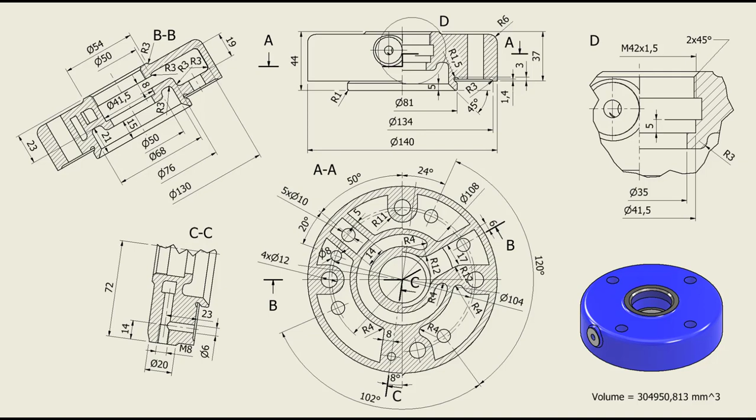Hi my friends, I'm finding it increasingly difficult to create drawings to support modeling. Although in this tutorial I still made a drawing, I propose that in the future we work with sketches instead of drawings, as you will see immediately.

This is the model of today, double lid. It seems to be simple, yes? But if you make this simple procedure, half section view, you see that inside is a new world. You see? This is not simple.

The drawing is this one. You have all dimensions here, I suppose, because in the last tutorials I made many mistakes. I forgot dimensions and so on. I'm not young, my friends.

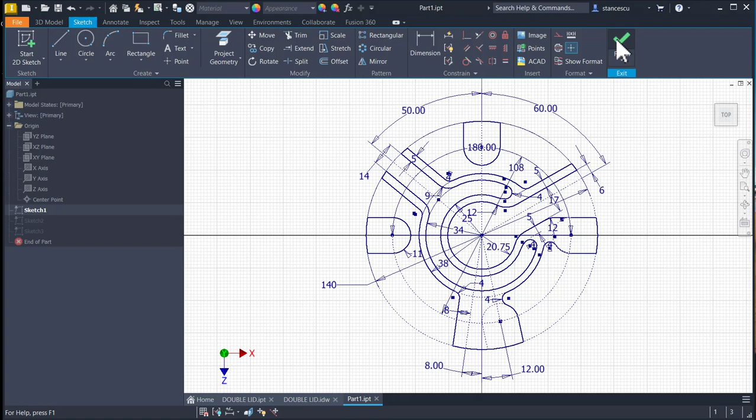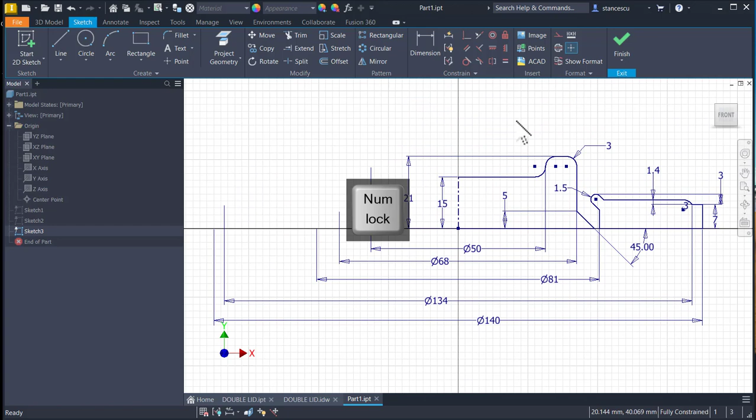So I start now directly by presenting the first sketch, the sketch I have to make, in any case. This is the first. The second, if I hide this one, this is the second. And this is the third. They participate in modeling of this part, as you will see right now.

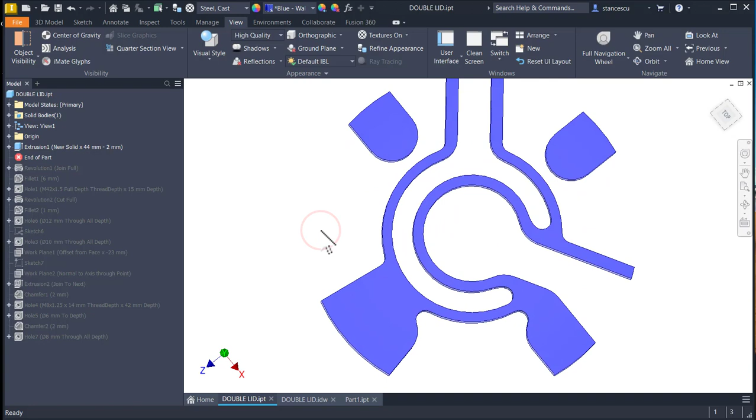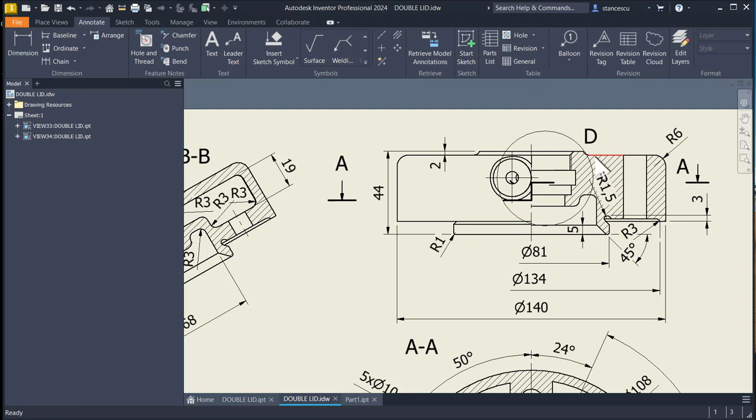I move the end of part to top and I move it only one step. This is the first sketch. The extrusion is 44 minus 2 millimeters. Now I go back to the end in order to access the drawing. You see here where that 44 minus 2 comes from, because I start from the base to this face with that extrusion.

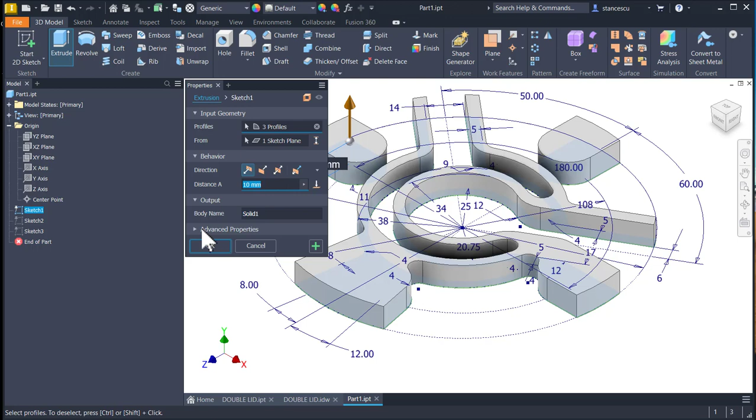Coming to the new model, I make this visible and I apply extrude of all these close contours on a height of 44 minus 2. Okay, we have the first volume now.

The sketch is visible. Yes, you see here, right here, instead of drawing, you see here dimensions. And I'm sure that nothing is missing. Since I use this very sketch to create the model, I am sure of the result. Both me and you, of course.

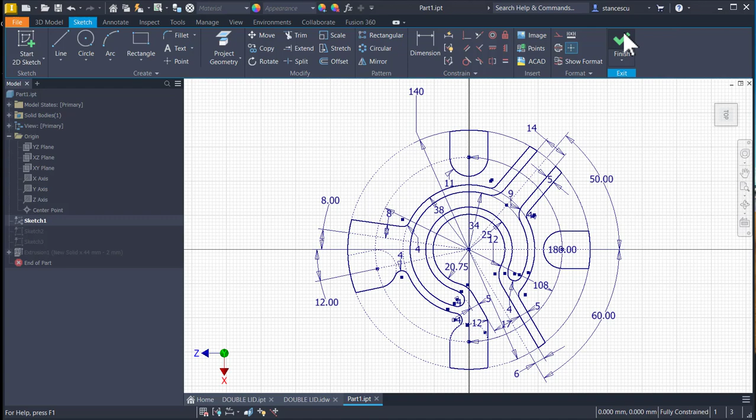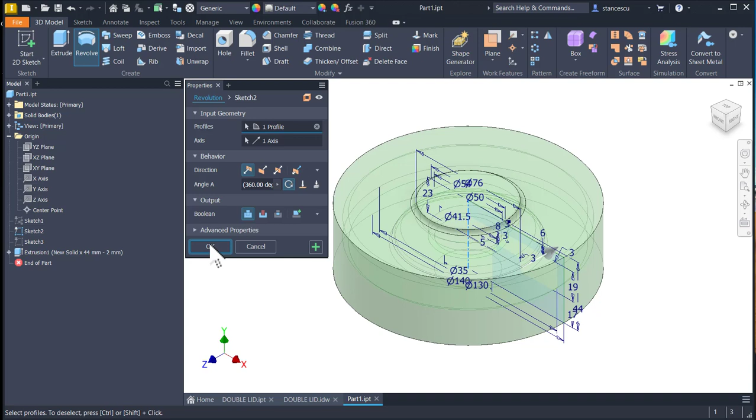Then I go to the next sketch, this one. I make it visible for you. And all I have to do is to apply revolve. Okay. I don't apply cut, because I want to add material to the previous feature.

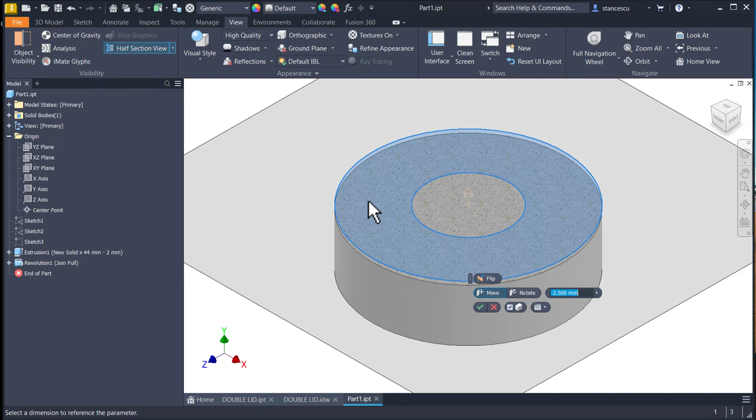Here is the real object. Take a look. View, half section view, and we have that structure inside.

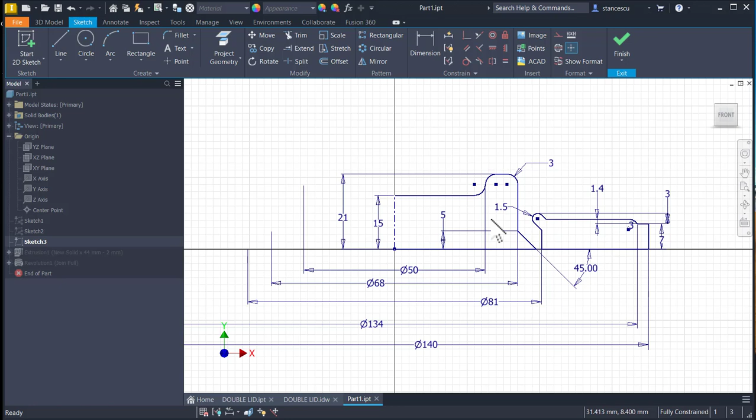The third sketch is this one, and we see that here there are two closed contour areas, so that we have to select both of them. I make this visible. I apply revolve, and I select the first and the second closed area.

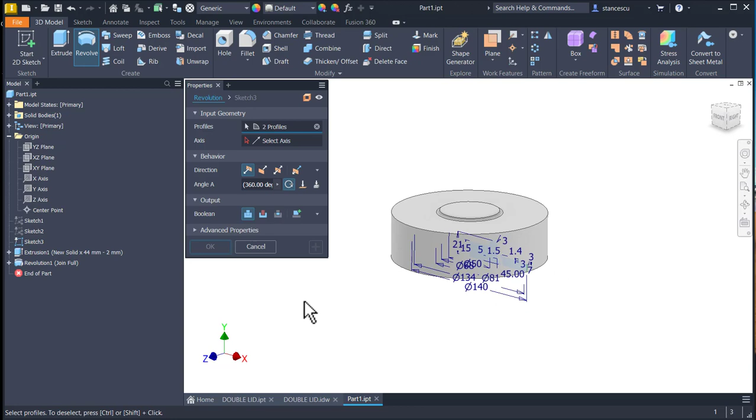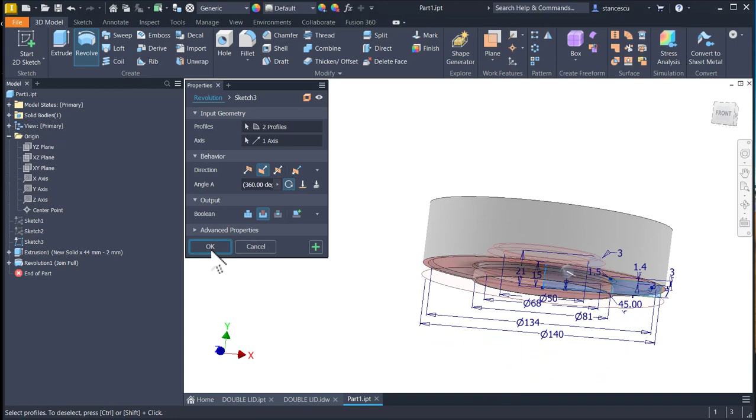The model must have cut instead of join. Now the axis is known, this one. You see what happens. All I have to add is this radius 6.

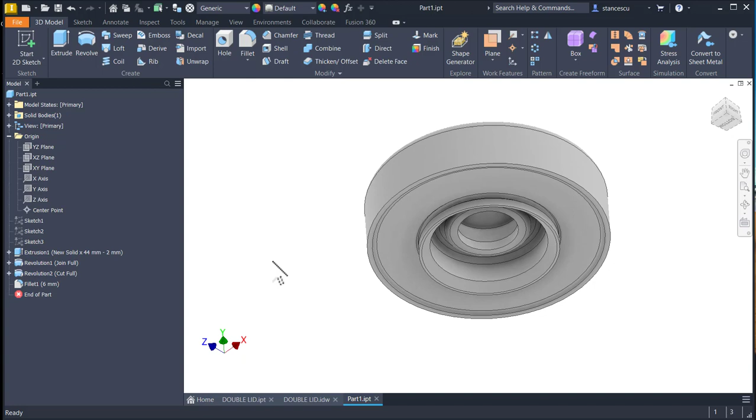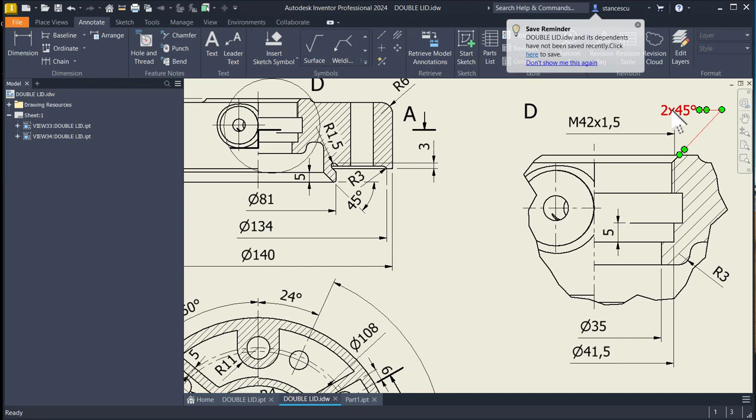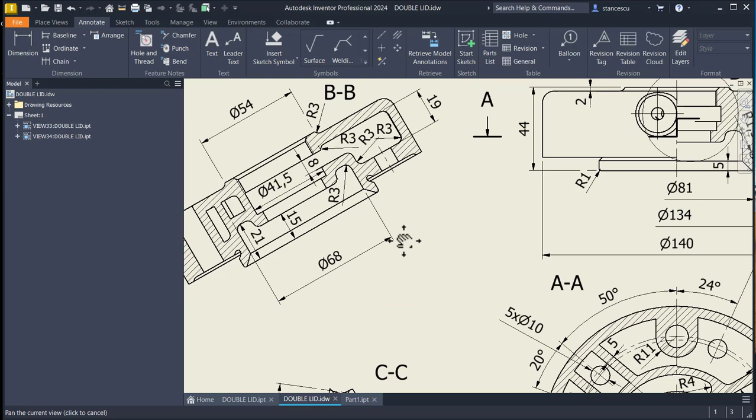Now there is a thread here. This one, metric 42 with a pitch 1.5, and also a chamfer. We select, but we need to know what is the depth. The depth is 8 millimeters here. You see, I forgot to place here the axis.

The axis. I'm not young anymore. I can place for you a dimension here to be sure of the depth. This is 10. If I place here 12, it's okay.

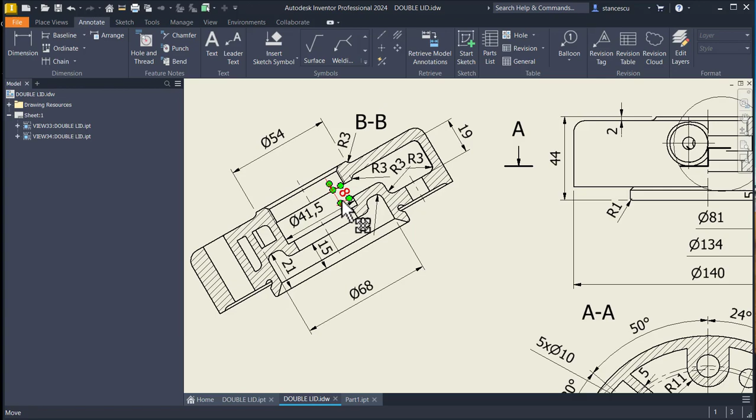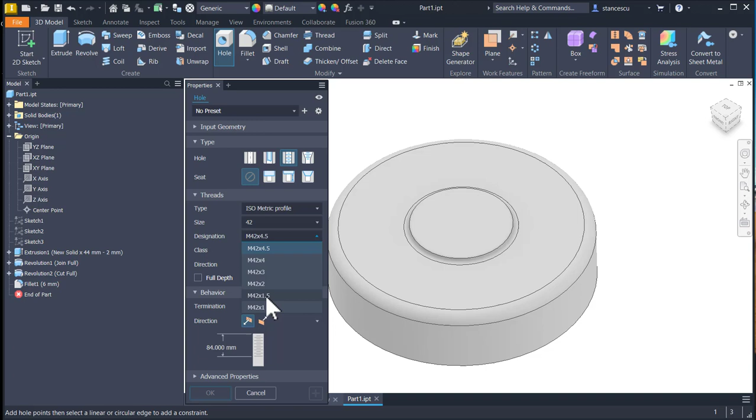Hole, thread, ISO Metric profile, diameter of 42, pitch of 1.5, not the normal pitch 4.5, but a special one. Where is this to be placed? On this face, in this center.

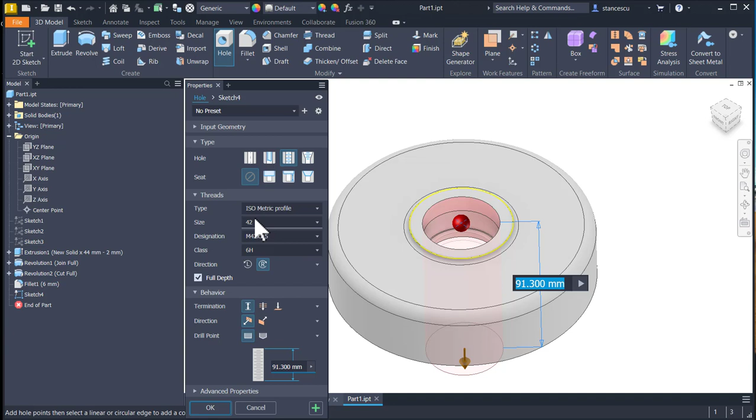Full depth, dimension with this finish, this flat end of 12. Okay. You see now that thread, and this is a chamfer of 2 millimeters, which is by default.

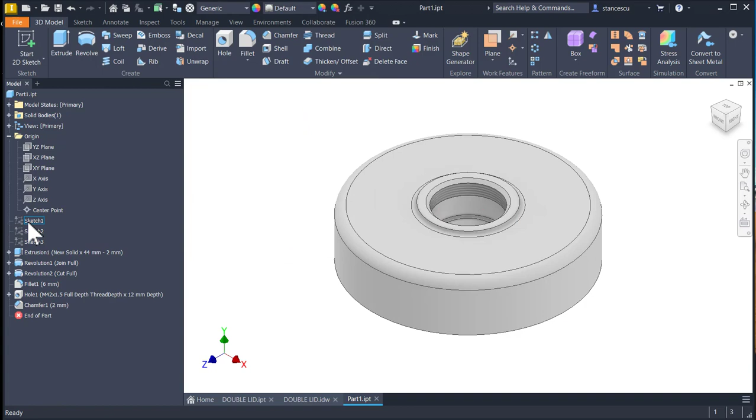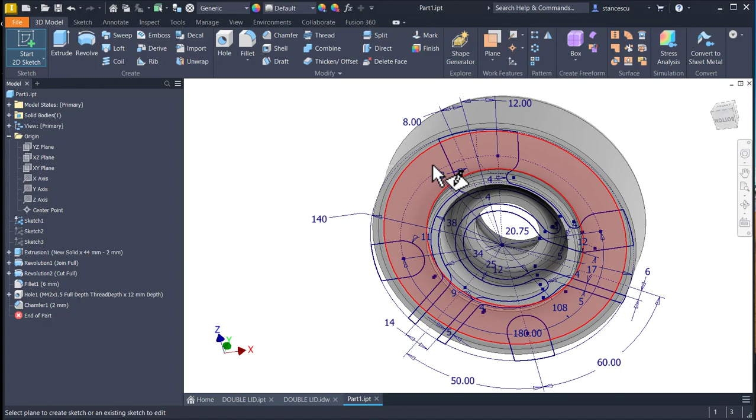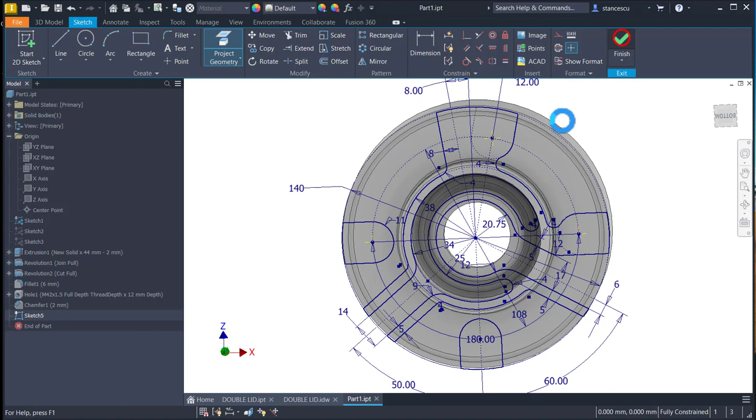Okay. Now we use the first sketch to project these 4 points. I create a new sketch, start new sketch on this plane, and I project 1, 2, 3, 4 centers. Finish sketch. I make this not visible, and I use these points to place the 4 holes.

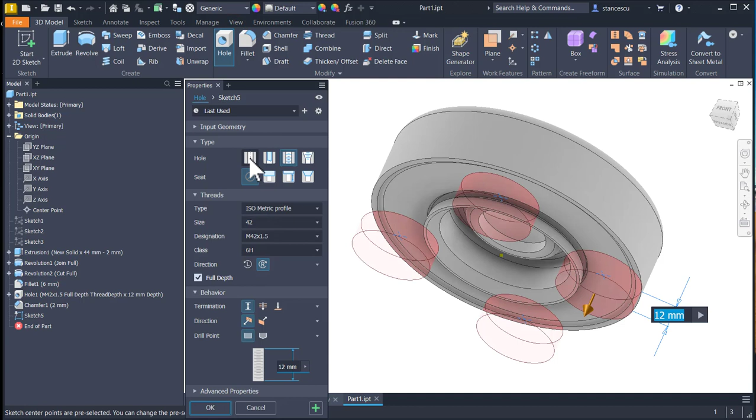Holes of 12, placed 1, 2, 3, 4 in this middle hole, not threaded, but with a diameter which goes through all the part, 12. And since we have the other direction, all 4 at once. Okay.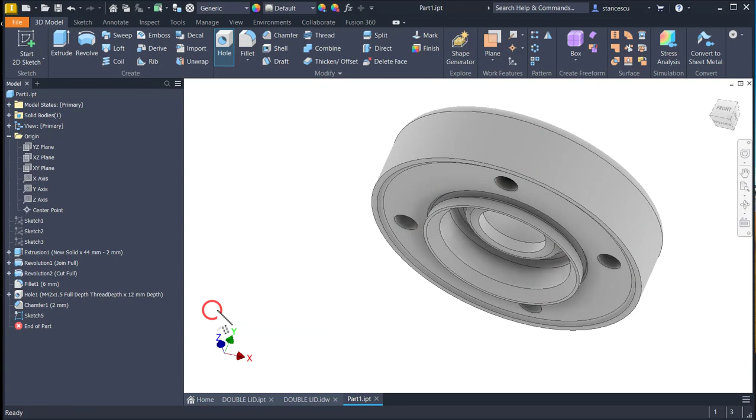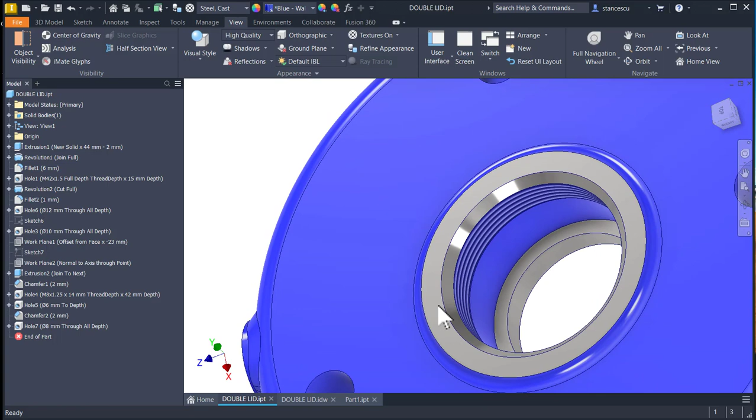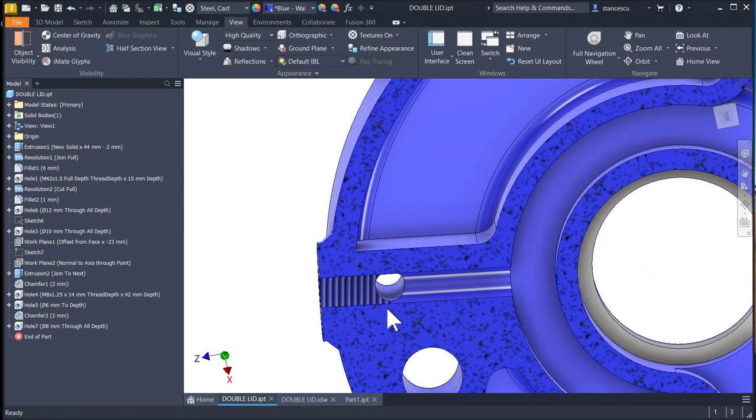Next is this, or better this boss with a hole which goes to a position here. Let me show you where it goes. It goes to this space, and there is another hole here. You see here all dimensions.

23 is the distance from here to the axis, 72 from the center to the face, 8 degrees this line, and we have this line in our sketch. All we have to do is apply 72, then metric 8 on 14 millimeters, then this perpendicular hole.

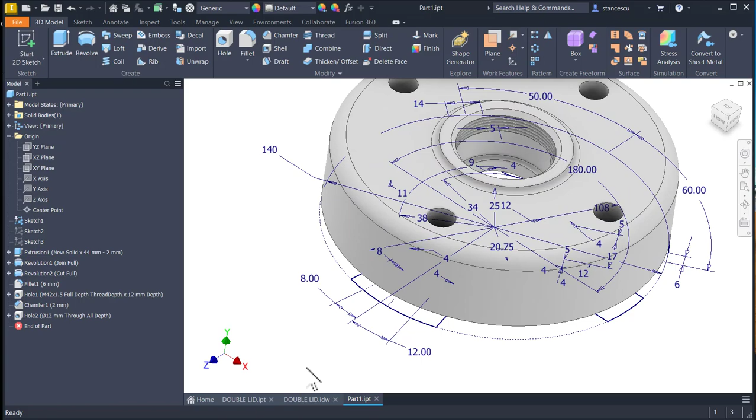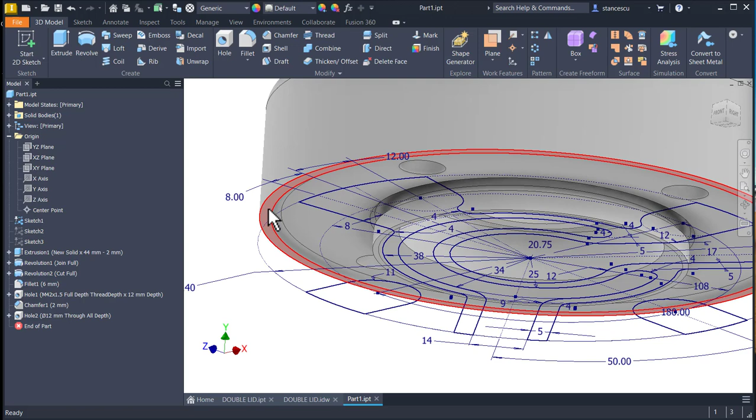I make visible the first sketch, and you see that axis at 8 degrees. I use this plane to create a new one at a distance of minus 23. I create a sketch here.

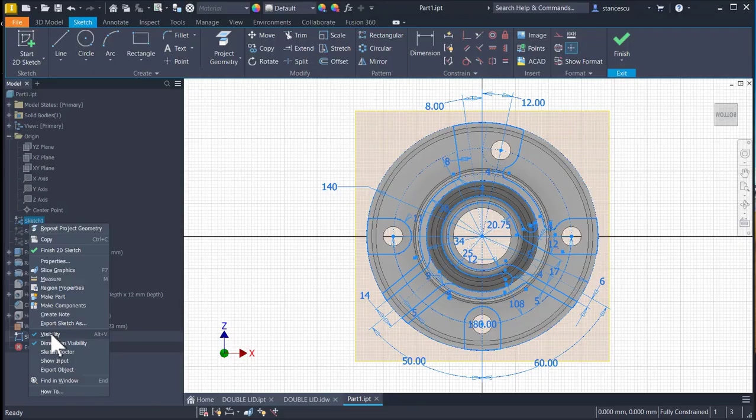I project that line, as I said, this one now is reverted. Project this line. I hide the sketch number 1, and now I know that there is a projected line here. F7 to see inside, and you see the line.

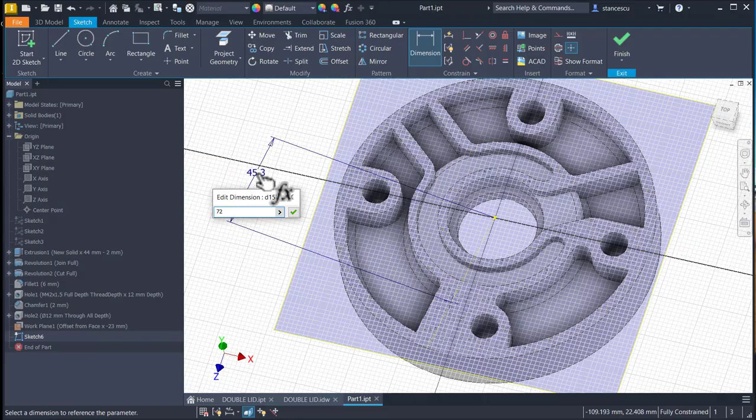I place a point on this line and the dimension of 72 along that line. 72. It goes outside, as you can see. Finish sketch. Hide the plane.

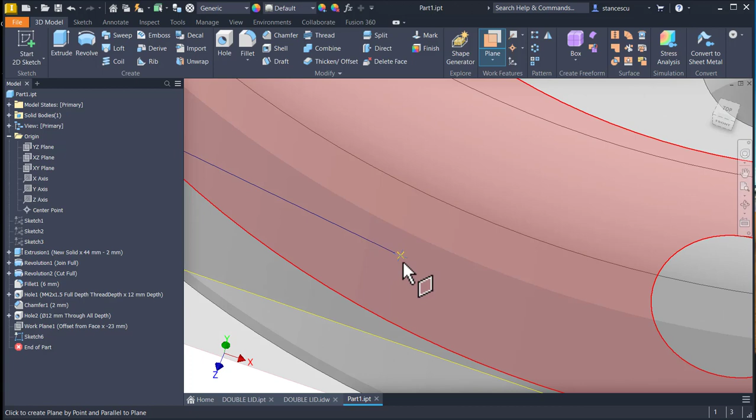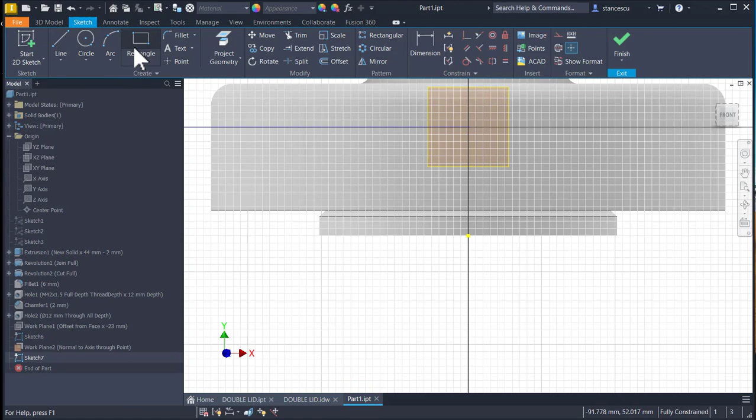Create a new plane in this point on this axis. The axis is the inside. This is the axis. You see the plane. In this plane I draw a circle of 20. Where from 20? This is 20. Project the line, this line, to have this point. And then a circle with this center of diameter 20.

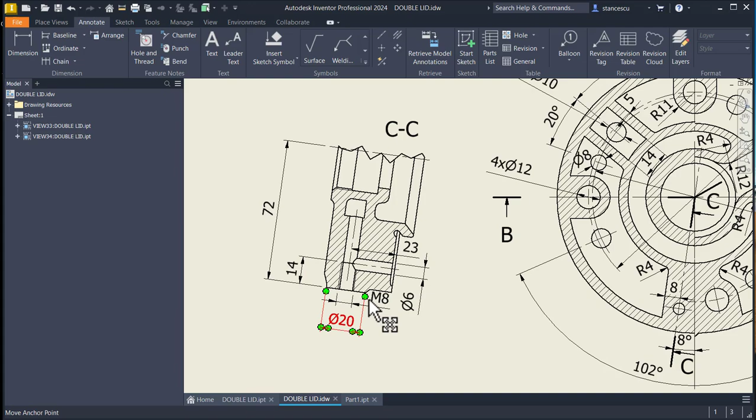Finish sketch, extrude to the part. Okay, and there is a fillet here of 2 millimeters, which was forgotten, of course. This is the fillet. I can measure it. Measure.

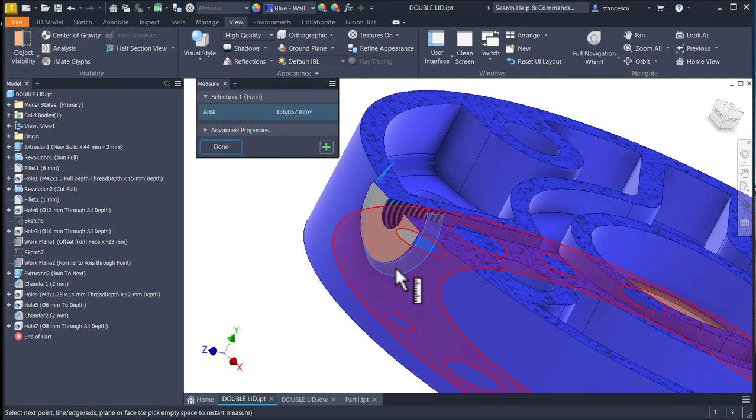I cannot measure, but I know it is 2 millimeters. You see, this is the drawing. I miss dimensions and so on. I work a lot with such drawings, and you have hundreds, my friends, hundreds of such drawings.

From now on I'll make only sketches, and this will be the base for creating models.

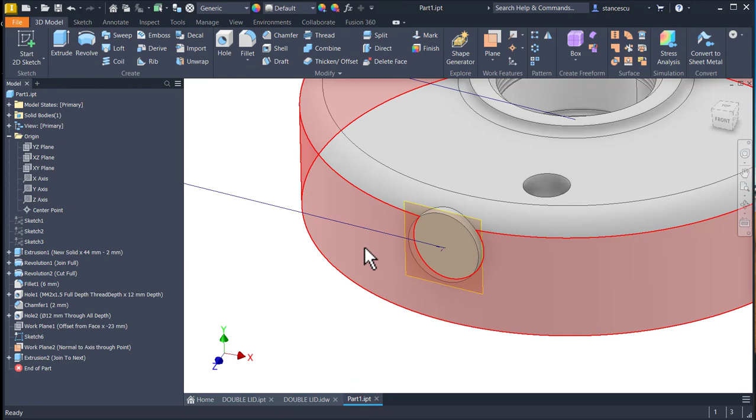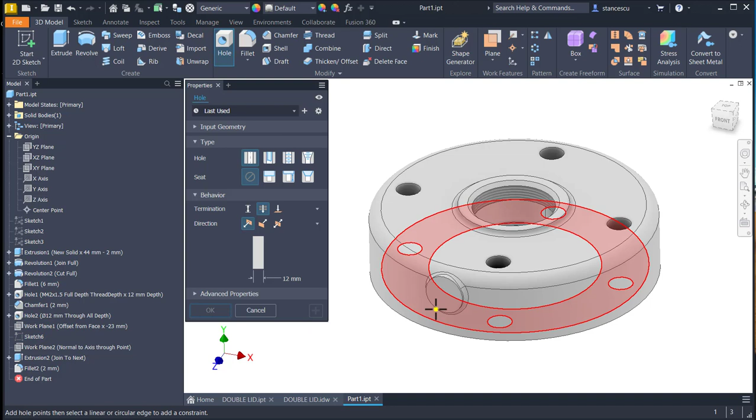I apply visibility, non-visibility, and chamfer a fillet of 2 millimeters. Then the sketch is no more necessary, and I apply a hole on this face with this center.

On a distance, threaded, ISO Metric profile. 8 is the dimension, with normal pitch, which is 1.25, normal angle, and the depth is 42. I know this because I made the model. The depth of the thread is 14, as you know.

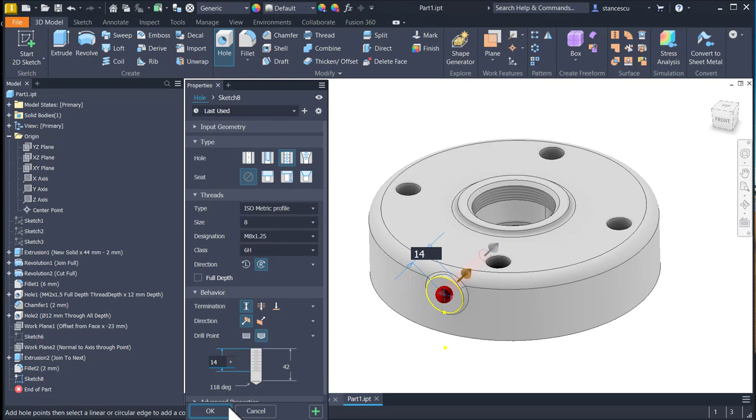It goes to that face. The other hole is placed at 14 from this face and goes to the hole.

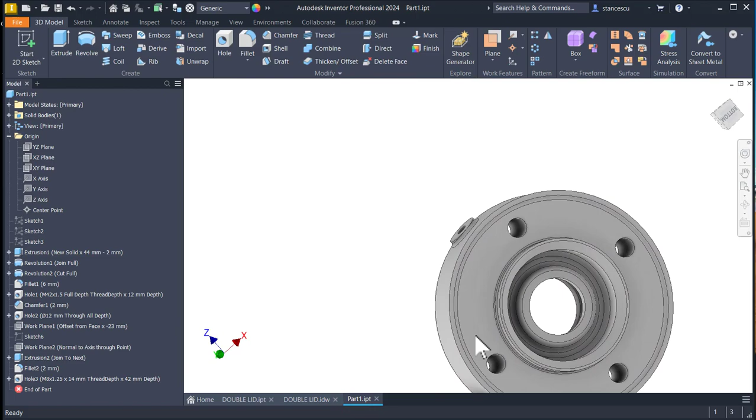We can do this very easily. I select this face, I project this circle as a line, and I draw a line from this point to the center of this.

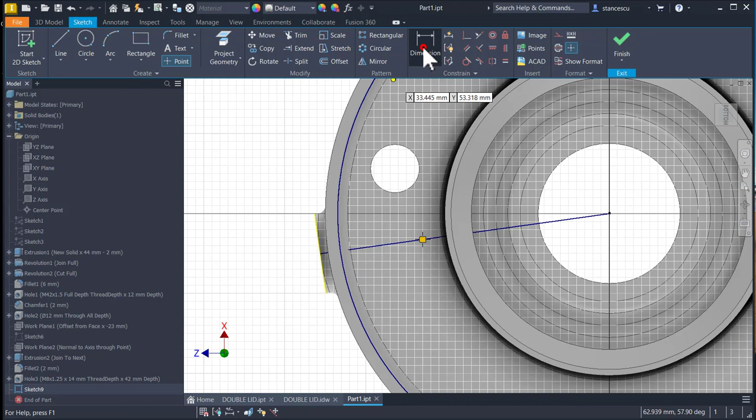I place a point on the line and the dimension of 14 here.

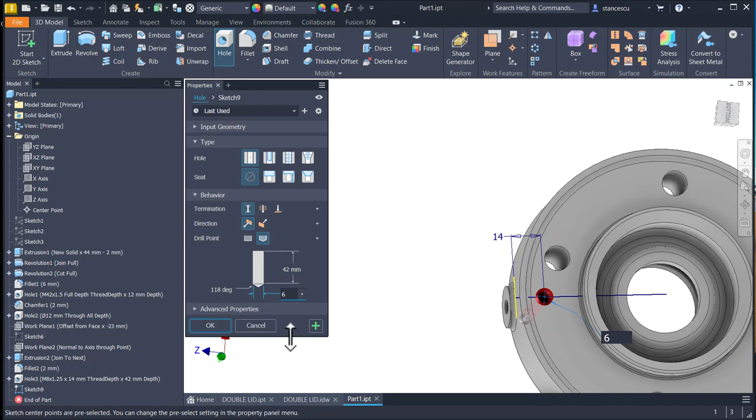Finish sketch. The hole is not threaded. It has 6 millimeters diameter, and it goes to this hole. You see, this is the hole and it ends here.

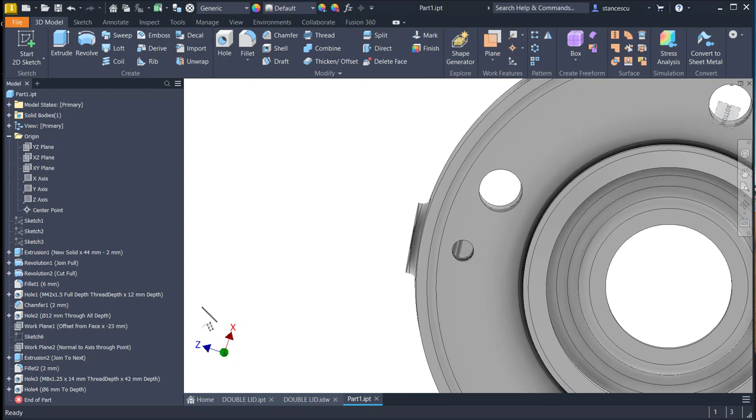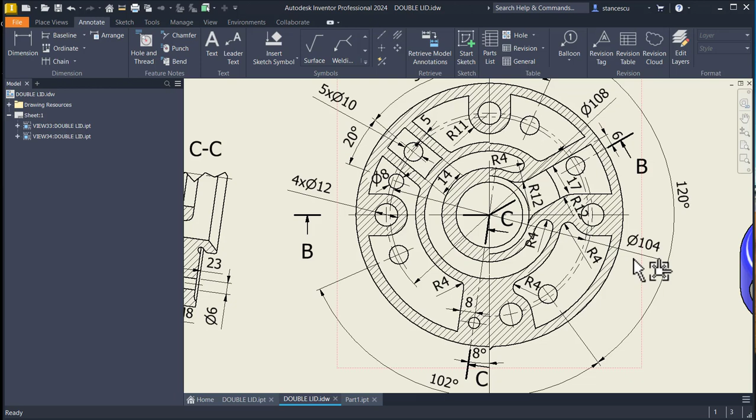Now there are some other holes. You see this one, 5 of 10 millimeters, placed on a circle with a diameter of 104. This is the circle.

The placement depends on these angles, 50, 24. This is on this axis, this one, then 120, then 102. This one is at 6 millimeters from this.

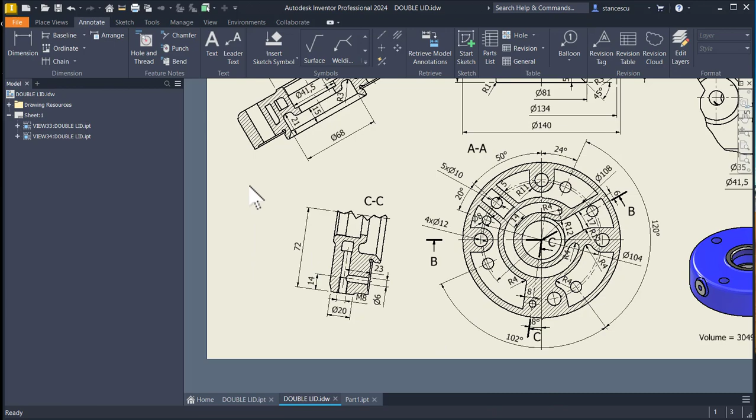Let's draw the circle and then we place points. I prefer to make holes from this direction, and this is why I use half section view to see the bottom.

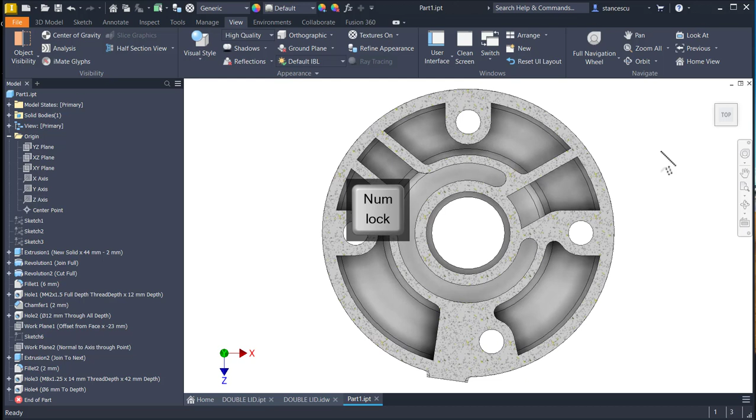We take a look from the top. This is the face for our new sketch. F7, and I make visible this sketch only to have this line, to project this line.

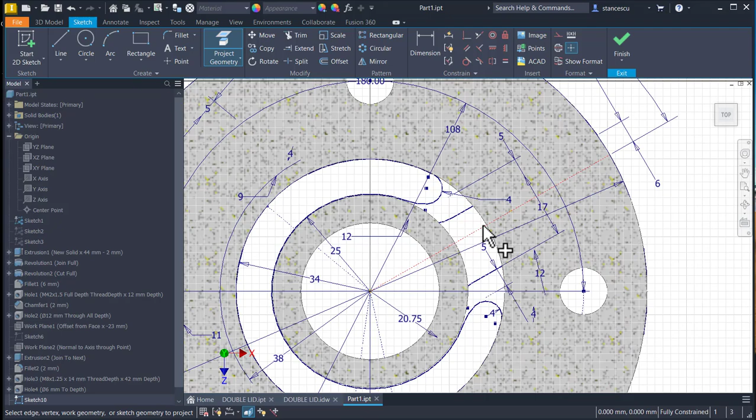This line. Project this line. Where is it? Here is. Then I hide that sketch because we don't need to have such a great number of lines and dimensions.

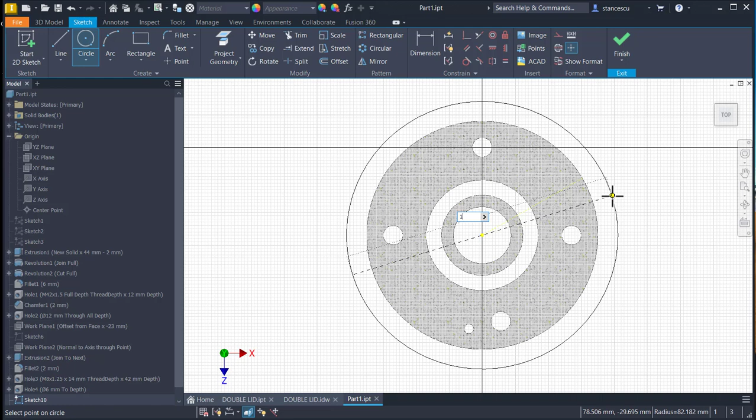Now I draw a circle with diameter of 104 and I draw lines. One of them is this one. I make it a normal line.

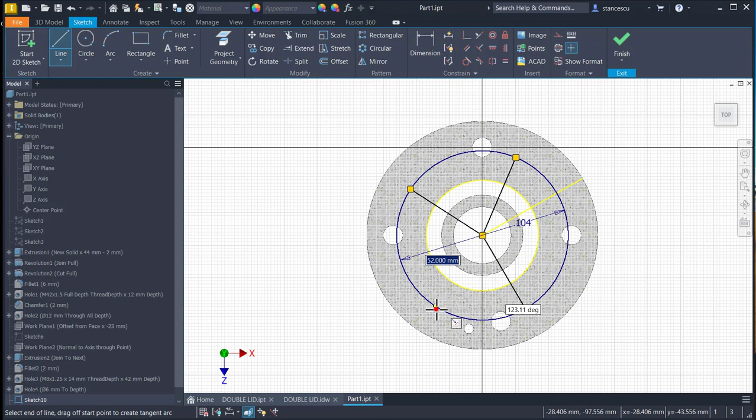Then there is one to the left, the other one is up here, the other one is down here, and the last is somewhere here. I think, yes, 1, 2, 3, 4, and this one.

I place points, 1, 2, 3, 4, and here I place on the line or on the circle, and then I make it to be on the other entity. 10 is the dimension? Yes, sir, 10.

Then, oh, I forgot dimensions. Excuse me. As always, F7. No, the sketch. Double click the sketch.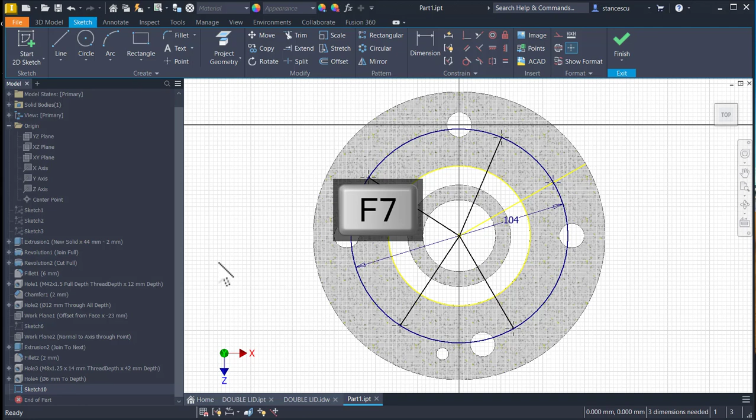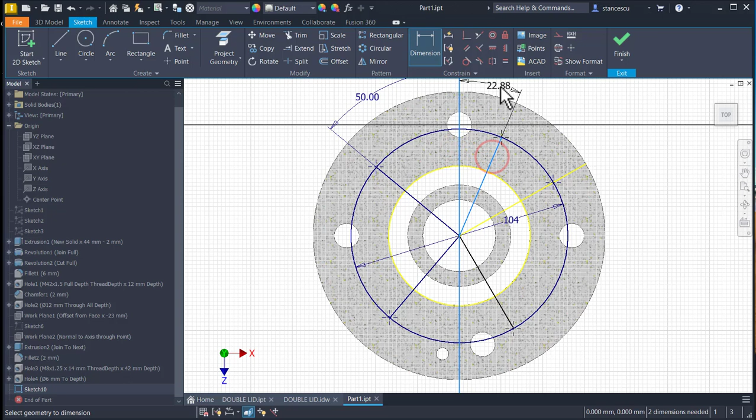F7 and angles. I project the vertical, which is the Z axis, and I apply 50 degrees here, 24 is this, 120 is this one, and 102 is the last one.

Oh, what is here? This is perpendicular or parallel with some other, with this one. Cancel. Let's see what is the constraint. You see, this is a constraint we don't need. Delete, and now I place...

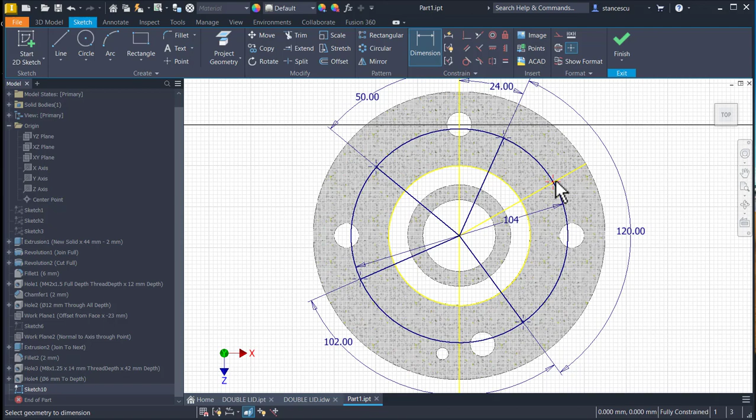102 between these two lines. 102. This is fixed. Good. Finish sketch.

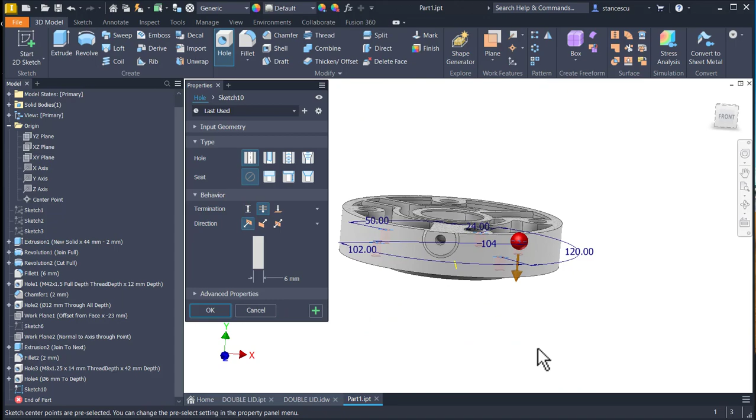Then hole of 10, through. This is the direction. Through, and it will be placed on each point. Diameter is 10.

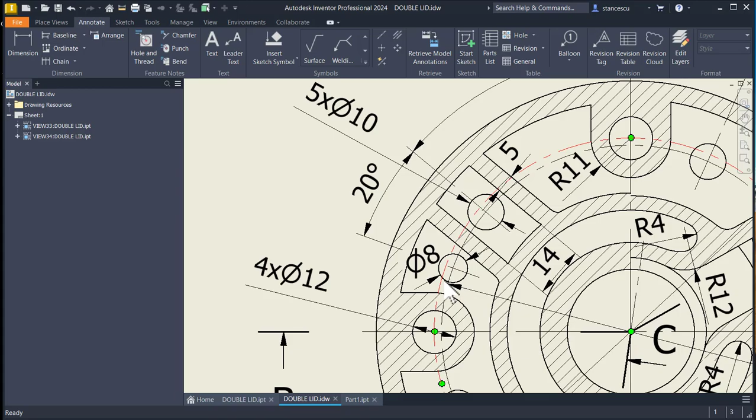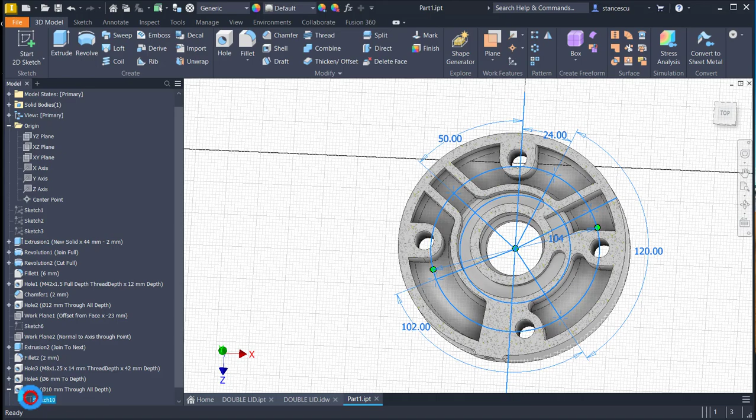The last hole is this one at 8 millimeters on the same circle, 104. Did I place 104 at the circle? I don't know. Let me see. Hole, sketch. Yes, it is okay.

Good. Now I place that new hole on the same circle, 20 degrees.

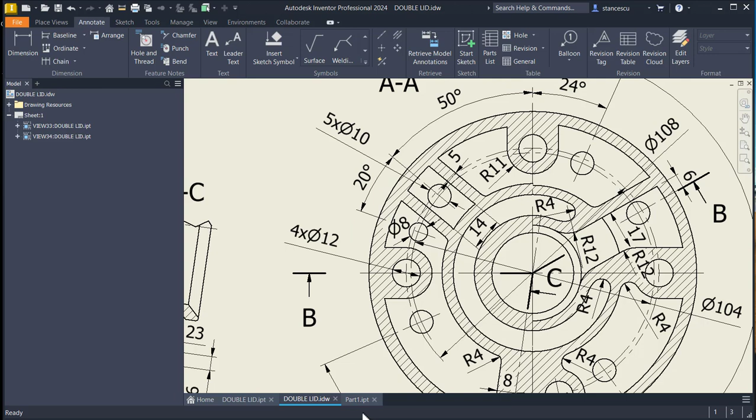Look at me. I share the last sketch, share sketch, to have the circle and all the dimensions. And I select the new, the same sketch to add a point right here, a line from the point to the center, and the angle of 20 between this line and this line.

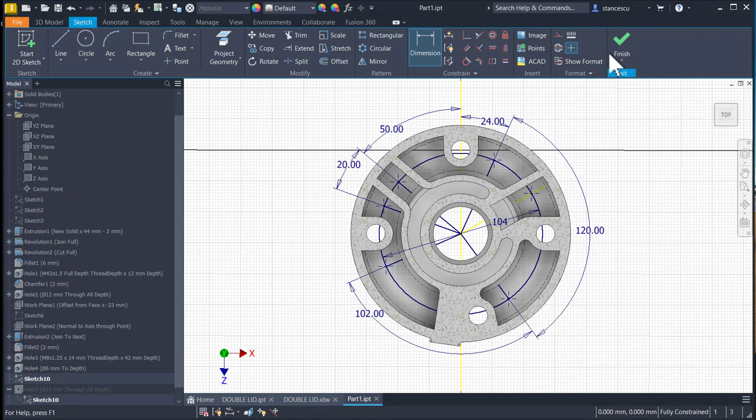20. What is the dimension? 8 instead of 10. Now you see all that holes here as in the drawing. I make not visible, or I hide this.

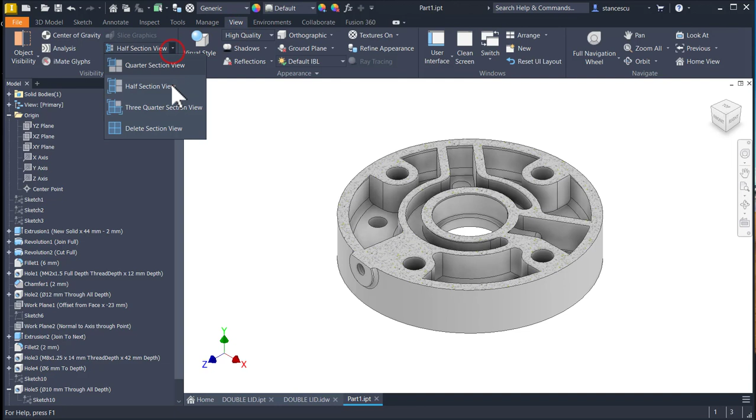And now I close the part, delete section view, I apply material, steel, cast, and the general color, which is blue.

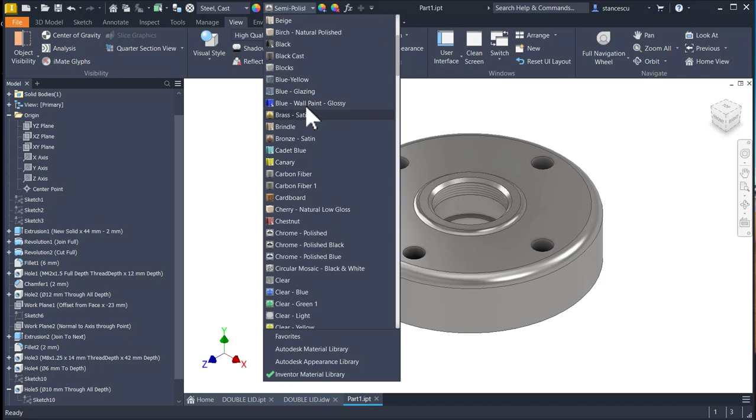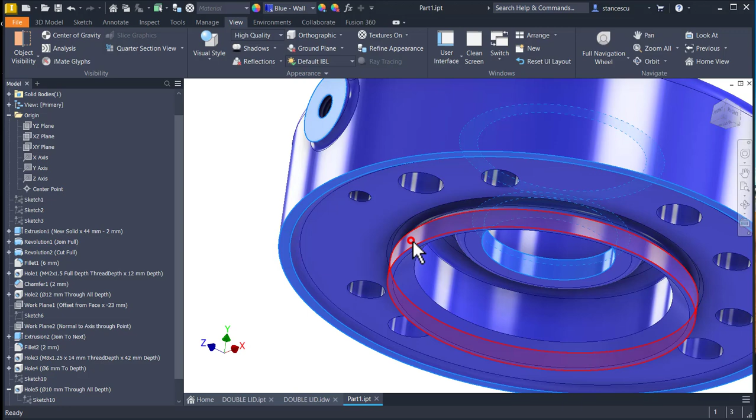Blue wall paint glossy, and I select some faces by keeping pressed the shift button to be machined. This and this. That's all. Semi-polished.

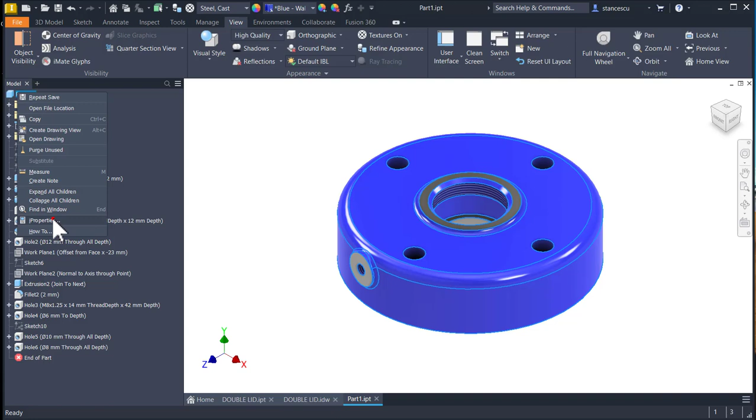Yes, and we have the part. Now I verify what is the volume of the part we made today together. No matter what value is on the drawing, we are sure that this is what we did. Yes? Okay.

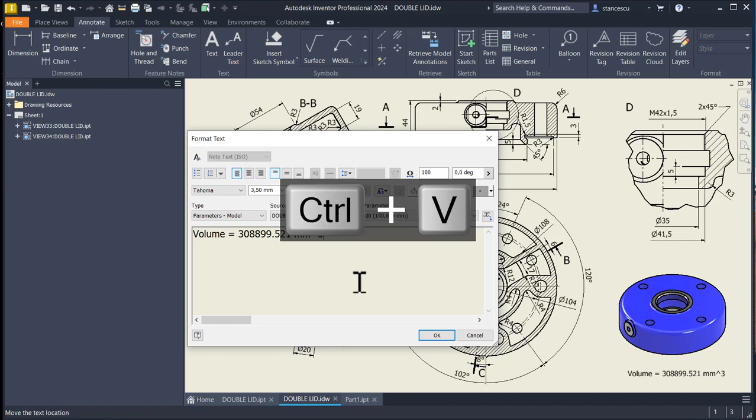I repeat, this is the drawing and I don't have time to create drawings. I make sketches, I present them as you saw now, and that will be the final work. You can review hundreds of drawings, as I said, which are made by me in the previous tutorials.